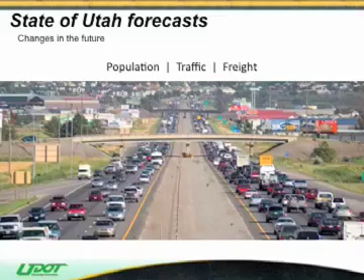Recently recognized in Forbes magazine as the #1 commuter-friendly city in the country, Salt Lake City and Utah as a whole are still facing the challenges of unprecedented population growth, the movement of freight through the state, and even faster growth in the number of vehicles traveling Utah's highway system. To address the challenges facing transportation and to efficiently use the resources elected leaders have provided, UDOT has developed a strategic direction aimed at taking care of what it calls its Final Four.

UDOT's available federal funding to tackle transportation challenges has some limitations. Over the past 13 years, despite increases in construction costs, that funding has stayed level at about $200 million a year. The Transportation Commission has also noted that due to inefficiencies using federal money, a federal transportation dollar is only worth 85 cents when compared to a state transportation dollar.

Utah's elected leadership, including Governor Gary Herbert and the state legislature, led by Senate President Michael Waddoups and Speaker of the House Dave Clark, have recognized that to maintain Utah's quality of life and economic growth, a substantial transportation investment using state dollars is required. Since 1997, the state has funded transportation improvements through a series of programs totaling more than $7 billion.

In addition, the state recently bonded for more than $2 billion to rebuild the I-15 Utah County Corridor, I-15 Core, the Mountain View Corridor in western Salt Lake County, and the Southern Parkway in St. George. On the I-15 Core project, given the significant improvements to I-15 that exceeded the available budget, UDOT elected to use a federally accepted procurement approach called Fixed Price, Best Design.

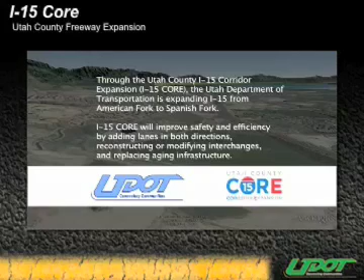This procurement method set a defined price that fostered competition between design-build teams to propose innovative ways to provide the most length and greatest number of improvements for that price. This method resulted in the project going from 14.8 miles with 8 interchanges to a 24-mile-long project and 11 interchanges. The project is finalizing the construction schedule and hiring a significant team to build 24 miles of freeway improvements.

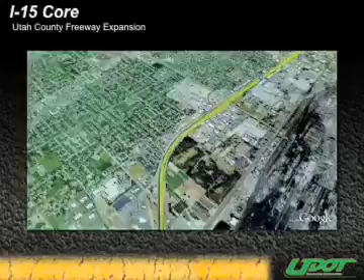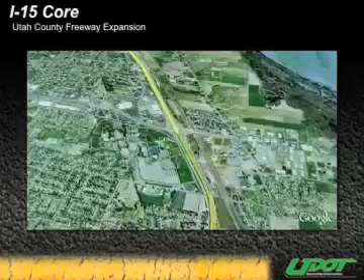The contractor plans to begin working on the main line this spring to add 2 southbound and northbound lanes on I-15 between Lehi and Spanish Fork and extend the express lane between Orem to Spanish Fork. Drivers will experience work along the entire corridor to help meet an aggressive timeline that finishes the project by December 2012, 2 years sooner than originally projected.

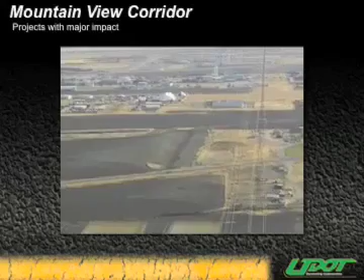The Mountain View Corridor in Salt Lake County gained an additional 5 miles, stretching the project 15 miles from Redwood Road, approximately 16000 South, to 5400 South. Design modifications by UDOT combined with the current economy, a reduction in material costs, and a competitive bidding environment extended the project. Initial construction includes building 2 outside lanes in each direction with signalized intersections where future interchanges will be located.

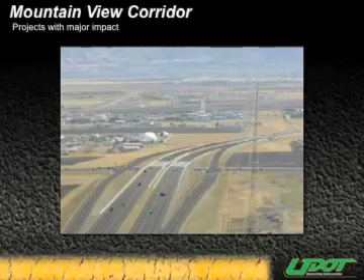Future construction will build out the remainder of the corridor by adding interchanges and inside lanes to achieve a fully functional freeway. Building the outside lanes first preserves the land in the middle where future lanes can be added. A transit solution is also planned. The Southern Parkway is a major new facility to help deal with the tremendous growth in St. George. It is being built in 6 phases, 2 of which have already been completed. The next phases that will connect to the new airport will be open in 2011.

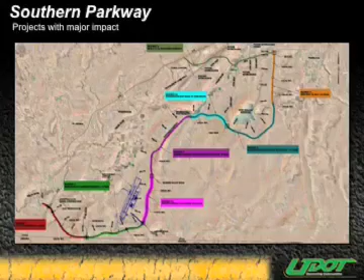UDOT is becoming more tactical, more creative, more efficient, and more innovative to maximize the investment in every dollar spent on transportation. Its goal is to obtain the most project for the cost, minimize impacts to the traveling public, deliver projects in a shorter time frame, and obtain a greater value for the budget. As part of that effort, UDOT works hard to find new engineering solutions to the problems caused by congestion.

One of these is the Diverging Diamond Interchange, DDI, in American Fork. The DDI at Pioneer Crossing will cost less, be built more quickly, and function more safely and efficiently than other possible options that were considered for the American Fork Main Street crossing. It looks different than a traditional freeway interchange with cross points at each end of the bridge. The cross points allow for more open traffic flow between the freeway and the interchange by allowing left turns on and off the freeway to be made without stopping at a traffic signal.

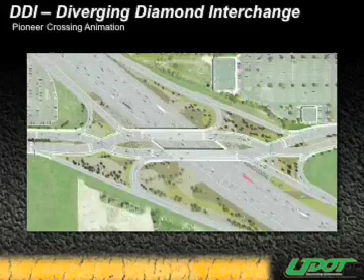Signals are placed at the cross points to control the flow of vehicles across the interchange. Moving bridges overnight has become almost commonplace in Utah. What used to take months or even years now takes just a single night.

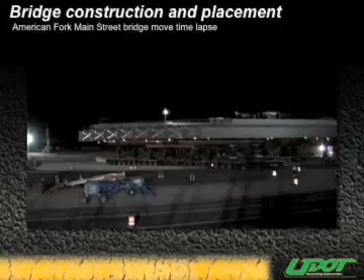The DDI bridges were the 17th bridge move of its type in Utah, more than any other state, with the bridge decks the largest to date, more than 192 feet in length, and weighing 4.3 million pounds. Accelerated bridge construction techniques have helped dramatically reduce the impact of construction projects to the traveling public.

Another innovative approach to traffic management will be the commuter lanes being built as part of the SR-92 project in northern Utah County. These lanes were developed to provide a direct connection to and from I-15 while providing access to local city roads using a 5-lane arterial. The commuter lanes bypass several traffic signals between the East Frontage Road in Lehi and Highland Boulevard in Highland City,

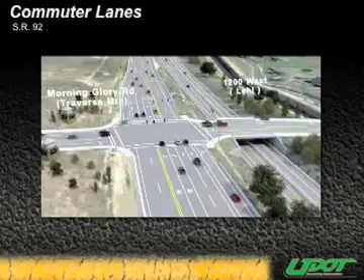saving time for commuters. Construction of the commuter lanes will begin this spring, and portions of it will be used to keep traffic flowing while crews expand the new 5-lane arterial road. The commuter lanes will officially open once the project is complete in fall 2011.

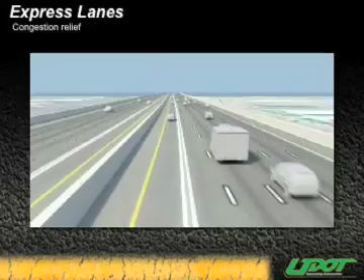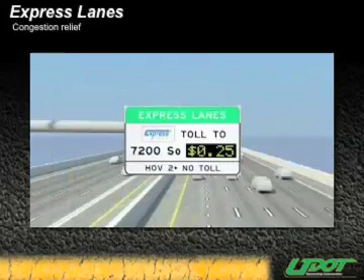Utah's 44-mile express lane system is already one of the longest in the country and has proven highly successful in proactively helping to manage traffic on Interstate 15. UDOT is currently working to implement a dynamic pricing system that will further allow for real-time congestion management of the lane while preserving free benefit of the lane to carpoolers.

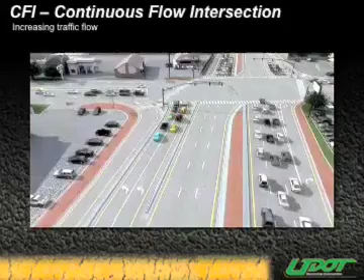A continuous flow intersection has already been designed, built, and implemented successfully at Bangerter Highway and 3500 South. This intersection traditionally saw heavy congestion, particularly for east-west movements. The new design allows for more green time, shortening the delay motorists have when reaching this area.

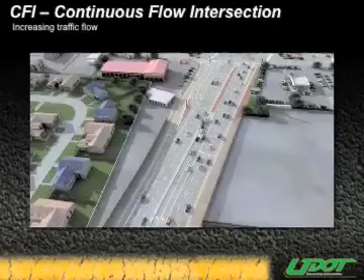UDOT has plans to build at least 5 more: 6200 South in Redwood, 5400 South in Redwood, 5400 South in Bangerter, 4700 South in Bangerter, and eventually 4100 South in Bangerter.

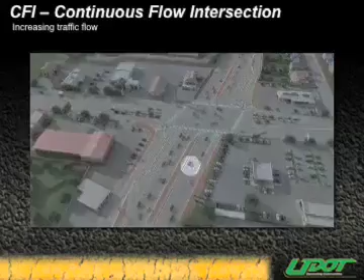Another project underway that improves traffic in a safe, efficient, cost-effective manner is the flex lanes on 5400 South. This area of Taylorsville sees a heavy directional traffic buildup during peak AM and PM travel. The flex lanes are designed to allow for an extra lane of travel during those most needed times.

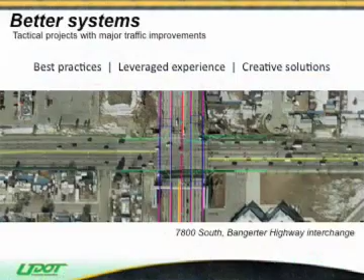All of these approaches and innovations have a high gee whiz factor, but UDOT doesn't do them for that. They use innovation to improve the transportation system and to improve the quality of life in our Utah. During construction, UDOT is seeking ways to minimize its impact to the traveling public.

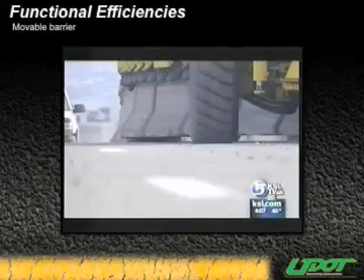Using a movable barrier system as part of construction projects has proven a successful method of allowing the maximum possible open traffic lanes during peak travel times in construction zones. The barrier has been used in projects like the I-80 reconstruction project, the Express Link project near Beck Street and I-15, as well as 3500 South in West Valley City.

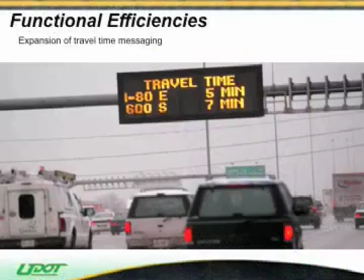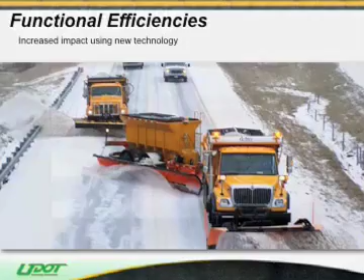Using the latest road sensor technologies, UDOT is able to predict travel times for motorists, allowing them to make decisions for reaching their destinations in the shortest amount of time. UDOT has even taken a hard look at how to become more efficient in its snow removal efforts. One new innovation is what is called a tow plow. This allows one snowplow to be able to do the work of 2, saving time and resources. UDOT is using the new tow plows in several locations across the Wasatch Front.

Improving safety remains one of UDOT's primary goals, and through the Zero Fatalities program, progress is being made. There were 245 fatalities in 2009, the lowest number since the mid-70s. However, UDOT's goal remains 0. UDOT recently targeted reducing run-off-the-road and crossover crashes due to their severity. After installing hundreds of miles of rumble strip and new median barriers, those types of crashes have decreased dramatically.

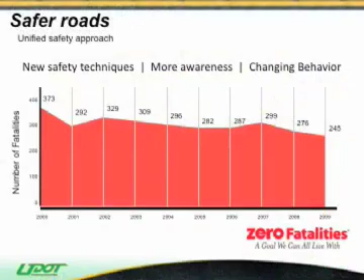The other component of its safety efforts is educating the public on safe driving behaviors. This past year, UDOT released an educational video that explained the consequences of texting while driving. The video has been downloaded millions of times, and UDOT is taking that message to high schools throughout the state.